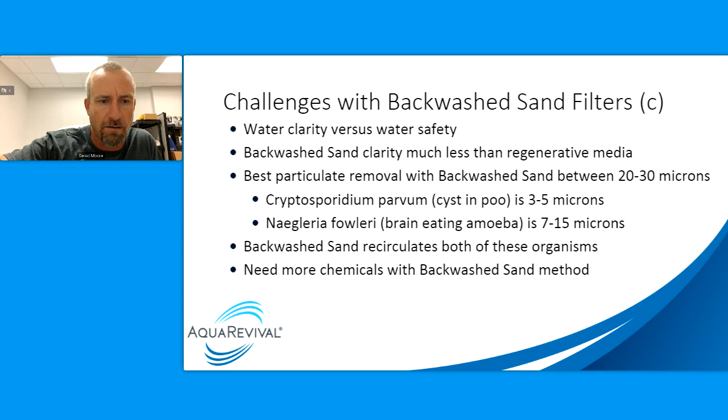Challenges, let's see here, with backwash filtration. Something to note on that last page, I think. About this guy here? No. This one here. This guy here?

You know, that size is comparable for what a change out would look like: getting rid of 6 sand filters and putting in 1 Aqua Revival filter that is about the same size as one of the sand filters. So I think that's good information on that slide.

Yeah, we have a 1 million gallon natatorium that's looking to go from 8 25-square-foot sand filters doing just over 3,000 gallons a minute, and they only need the 60 T to easily exceed their circulation.

Yeah, the big difference came when we got our filter certified at 2 GPM per square foot, and we're going to touch on this in a moment. Then making the big leap to 3 GPM per square foot, there are still people who aren't comfortable with that, but the more people get comfortable with it, they realize we can buy a smaller filter, and that significantly reduces your capital expenditure up front and improves your operational expense down the road.

So I am dying to get to this next slide because we've got some automation in the slide, and we don't have automation in all of our slides, but let's see if it works. Yeah, so there is the, I don't know how to make the number 3 and 4 animation work on that, so I apologize. There should be a line across that slide that talks about, oh, there it goes. One of my helpful folks in the background is helping me with that, I believe.

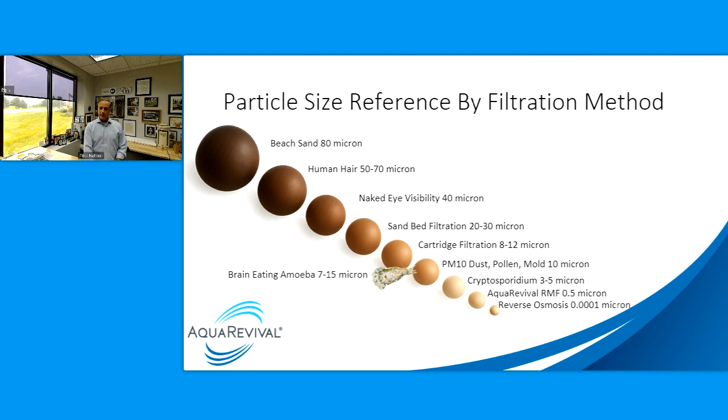But when you filter that crypto out, you have to demonstrate that you're not letting it go back out to the pool. UV will unzip the DNA. Ozone will destroy crypto. But when we catch it in the filter, it's not getting back out to the pool again. So we can filter out 99% of the crypto per pass. So per turnover, you're getting more. Now, obviously, more people jump in the pool, more crypto goes with them. But this gives you a sense of, and here's another slide looking at that same information a little bit differently.

It's really the same info, but it gives you a sense of, you know, a sand bed, you push that water in down from the top, and it's got to go through that bed and get stopped by the velocity going down and it getting trapped in between sand particles. Whereas with a Regen filter, pressure DE, like an Aqua Revival, you have dirty water come in from the bottom, and then it's got to go through that tortuous path of those septums, those filter tubes, through the media, through the tubes, and out the filter. And it is able to filter a much, much smaller particle.

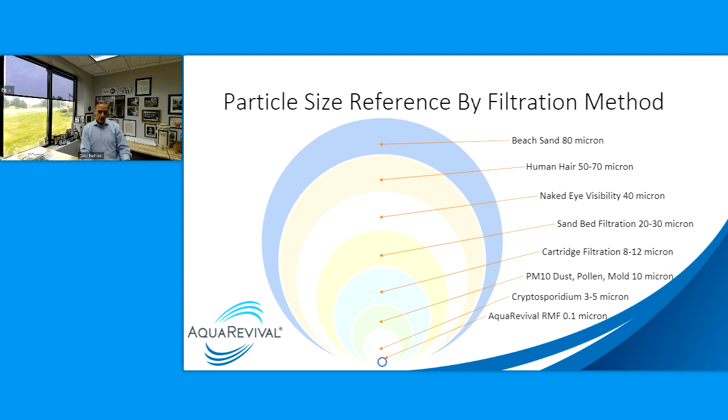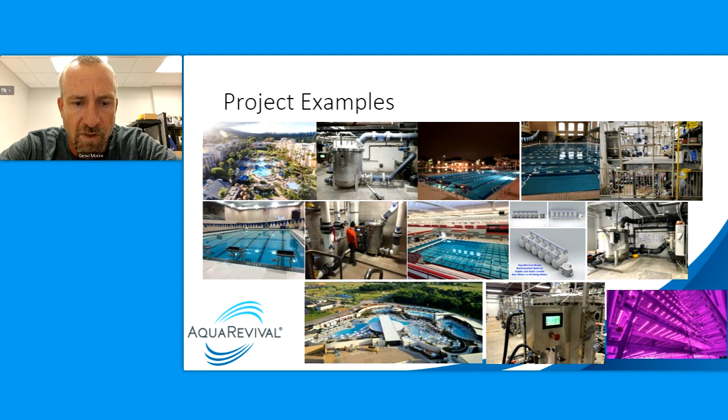The bottom right is your agricultural. The next one is Carmel High School. They now have 5 Aqua Revivals up and running there. All the pools look great. They couldn't be more happy. Great. That's great to hear. I know that bottom left one is one of yours, Bart. That's one of the casinos. That's one of the most challenging bodies of water we've done.

If you look at the water that surrounds that center, whatever you want to call it, that's actually like concessions, but that is all one continuous body of water. And the challenge there is going from a large area that's 6 inches deep to a deeper area, back to a shallower area. You know, maintaining the premium circulation was key. But then again, this is a facility that is in Oklahoma, and it's not really bound by, say, bather load rules.

So this facility will get to the point where you could almost walk across it on the heads of people and not get your feet wet. It's very crowded, very heavily used, and rarely ever has any issue that would result in a pool closure or cloudy water or anything like that. Certainly, we can point to the filters as a very core role in why the water is clear all the time.

Yeah, and when that pool was being built, I remember being down there during startup. They were sandblasting the deck at the same time we were doing commissioning, and there was more dust in that air and in that pool at that time as we were commissioning it. And it turned out, I think it might have been me, I put the wrong K value in, and we left, and the thing was screaming. And you guys went back out and found that the filter was running somewhere north of 3.

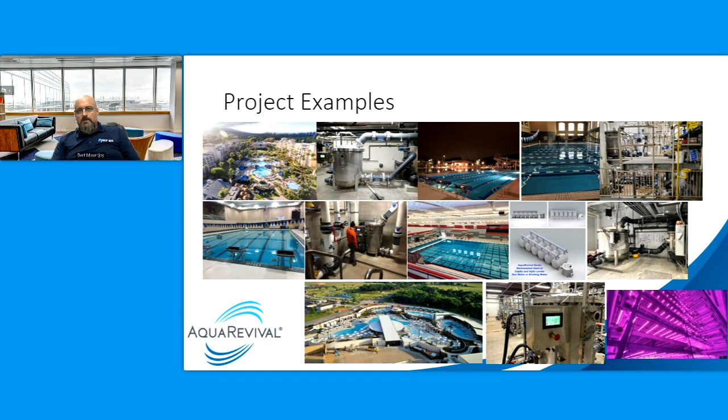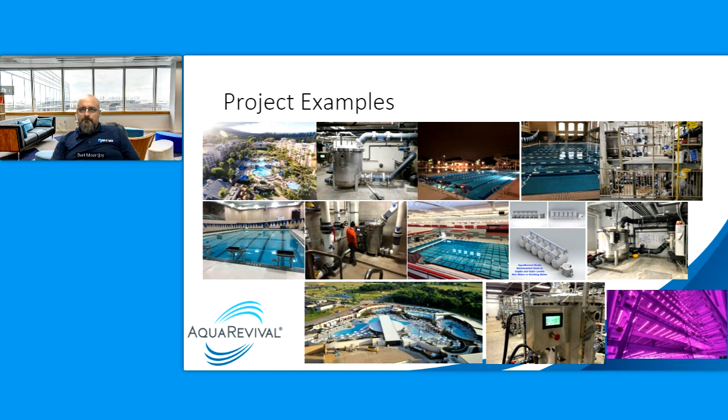It turned very red with all that Oklahoma red dirt, and it did. We ended up doing an enzyme soak on it with your enzyme process, and that was 3.5 years ago, and that filter purrs like a kitten to this day. Yeah, that's right. I'm going to jump to the next slide. So

You can talk about two things primarily, safety and sustainability, right? You want the safest water because you're putting humans in it, or you're putting animals in it, or you're doing something, but you want safe water. And we have the only NSF certified crypto filters. There's other people out there that talk about crypto, but we have demonstrated it. We went to NSF, we got the testing done with NSF because they're the gold standard. But

beyond that, let's say between that and sand, and you've got UV on your system. If you have sand and you're going to be backwashing, you're going to be backwashing chemicals and heat to the street, and you're going to be using more electricity to do that because of the geometries of those filters. You're also going to be working your UV harder. You're going to be working your lifeguards harder because the water's simply not as clear.

If you're counting on your UV transmittance to get UV to the crypto, to the brain-eating amoebas, to the other things that UV is designed to handle, or ozone, or chlorine, or anything that you're putting in the water to help your sanitization process, cleaner water helps the chemicals work better. And you don't need as much chemicals in order for them to work better. So it's really a multiplicative situation that you find yourselves in. And anybody who's running Regen can tell you that they have demonstrated that those are real world effects.

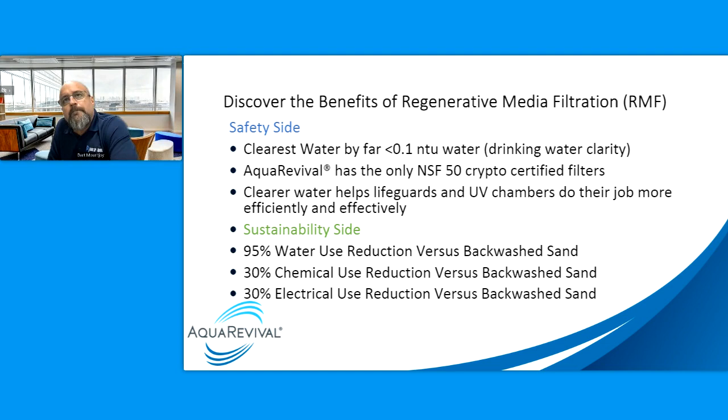and they have not had a single transmittance issue. I think the last time we tested, they were 97, 98% UVT, whereas last year they were lucky if they could get close to 90. And the only thing that changed was the filters. That was it. Interesting. And I will add that those sand filters did have brand new sand in them. Important, very important. So they weren't channeling. They were good. They were changed out.

We had a job that we did, tore out sand beds, put in Regens, went down there to do startup. I had a brand new pair of boots on, and Bart had the floor all wet, ruined my boots. That's not the point of the story, though. The point of the story is

the UV that was in that room at the time was saying that it was in spec. Walked into the room, and the city operators, I stopped one of them, and I said, "Hey, UV says it's in spec. It can't possibly be, because we're not flowing water through there." And the operator said, "Oh yeah, it does that all the time."

That is hugely dangerous, right? If you're counting on UV to get after your crypto, because we know crypto will live in chlorinated water for weeks. If you're counting on the UV to handle that crypto 100%, like you would if you've got sand bed filters, you're playing with fire a little bit. So

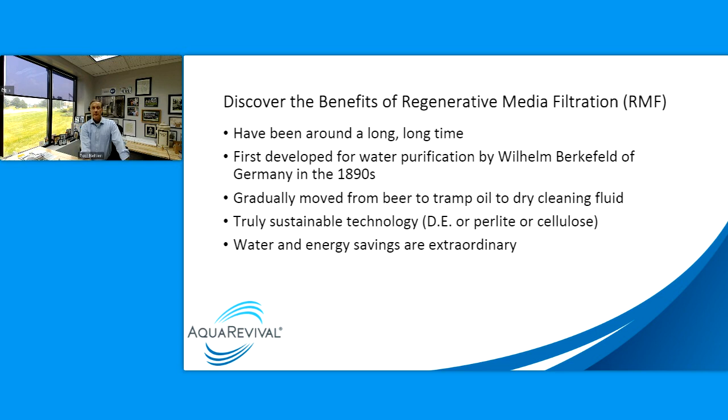there's a myriad of ways to skin the cat, depending upon if you're doing a reno, if you've got a pump room that is in a high water table area. We can handle all of these. All of these situations have been solved. So don't let anybody tell you we can only put in sand or we can only put in X because of Y. There's some really smart engineers out there who have come up with some really creative solutions to give you the best quality water.

And we work with those engineers. We have really good relationships with a number of the international engineers around. They spec our filters all the time. So let's see. Paul, to that, let's move on.

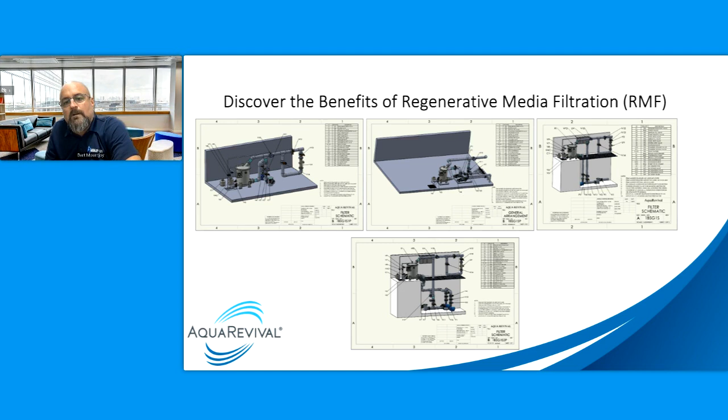I was going to say real quick, one of the big myths going around with Regen was you can't put Regens on a skimmer pool. It's got to be gutters. It's got to be a surge tank. But working together with your team and the engineers, we have these successfully on skimmered pools. We have them successfully on lift applications, actually challenging lift applications, despite all of these beliefs in what the Regen filter cannot handle. We like to come to you with challenges, and I feel like we've succeeded in all those challenging positions.

Yeah, we have some great partners around the country. You and Jared are head and shoulders right up there, top of the pile, as it were. So we're happy to work with you guys. We don't ever quit on anything, and we have solved some interesting dilemmas along the way.

This next slide, I am going to read a little bit of because it's a very important slide. So NSF, and I say NSF because they're the gold standard, but it could be IAPMO, it could be these other people who use the NSF standard as a testing method. They give you a filtration rating, and it's gallons per minute per square foot of your filter. Whether that is a sand bed, 20 gallons a minute per square foot of filter area I think is generally accepted as the maximum for sand bed. People usually don't go over, say, 15 or so.

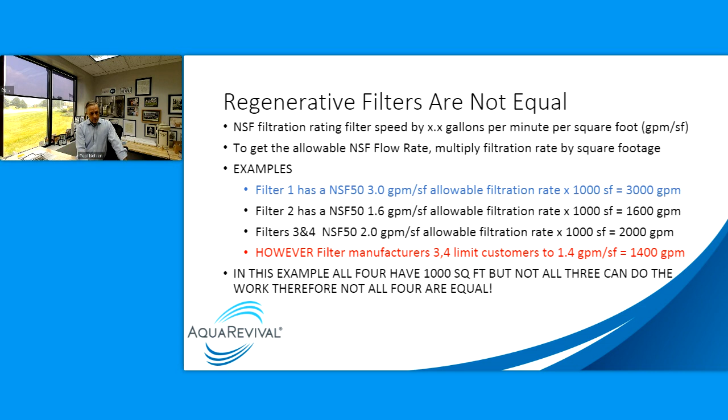So let me get to this guy here, and this is the only one, like I said, certified for crypto. But we wanted to talk about maintenance. So let's compare the maintenance. So side by side, if you are going to, why don't one of you guys talk about this? This is probably more in your wheelhouse, because you're managing these pools, running these pools.

Yeah, I have a good example, and I'll speak on Carmel High School's behalf again. Their existing pool was built in '98. The existing pool was pressure sand. They soon realized they had a problem with extended backwashes, because for whatever reason the subdivision on the neighboring road, those with basements, would experience those long backwash cycles in their own basement.

So that was a big deciding factor for them on switching to pressure DE. Just the water loss issue. None of those neighbors will ever be ticked off again, due to not having to expel thousands and thousands of gallons of water on a weekly basis.

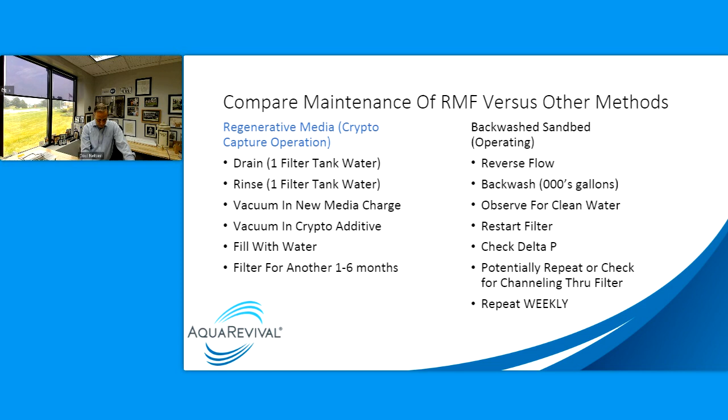Hey, Paul, sorry to cut you off. It's Jared. If we could back up just a minute to the media change on a pressure DE versus a backwash on a pressure sand. I guess I'll use Carmel again. Maybe it's just because we're proud of it, but it would take me twice as long to backwash that existing pool at Carmel High School as it would to do a media change. Maybe even 3 times as long, just to give people an idea of how easy the media change on the pressure DE really is.

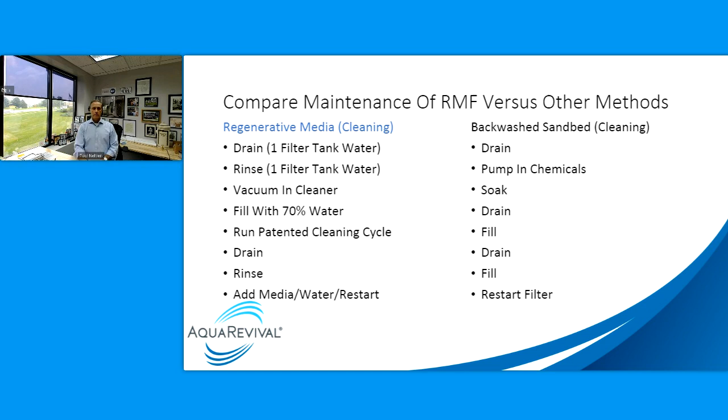That's all I have. Good point. Yeah. Good. All right. Let's see here. All right.

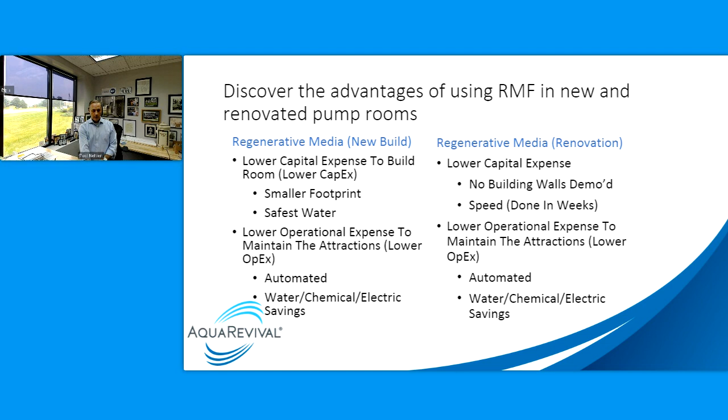Bart's been in pool rooms since he was smoking cigarettes and drinking beer as a kid. We were talking about that just before we got on here earlier. Thanks, Paul. I don't know if Bart's still on the line or if we caught him in a moment of weakness. I might have caught him in a moment of weakness. That's perfect. Okay, good. I'm here. Hey, I did want to get back to your cleaning. We moved on a little quicker than I was ready. Not to talk more about me because we don't need to do that.

And I don't know if we moved past the slide already or not, but you keep talking about NSF, and it's something that I hit on a lot of times with users, with contractors and with facilities: not only are you NSF certified with the crypto, you're NSF certified with the 3 gallons a square foot. Both to me are kind of game changing in the industry, but you're also NSF certified for clean in place.

And that to me is huge because I came out of the mechanical room, and I was the rat that was tasked with, hey, just make it work. We got to pass code. The pool needs to be open. Whatever that means, whatever the system is. When you look at a Regen versus a sand filter and the cleaning procedure, there's huge differences there. And it's commonly known, like, hey, you'll never get all the dirt out of the sand filter, right? You could backwash it for 3 days and there's still stuff in it.

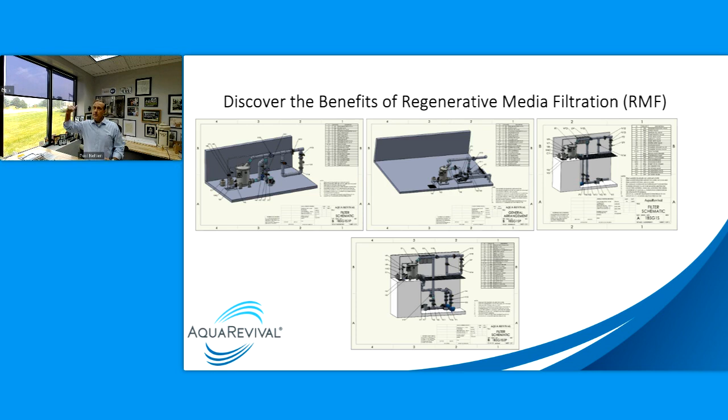If you're building a new building, you don't have to build as big of a building. You don't have to build as tall of a building. You can build a smaller pump room, and that will allow us to have an overall savings. Your total cost of ownership is lower with our filters.

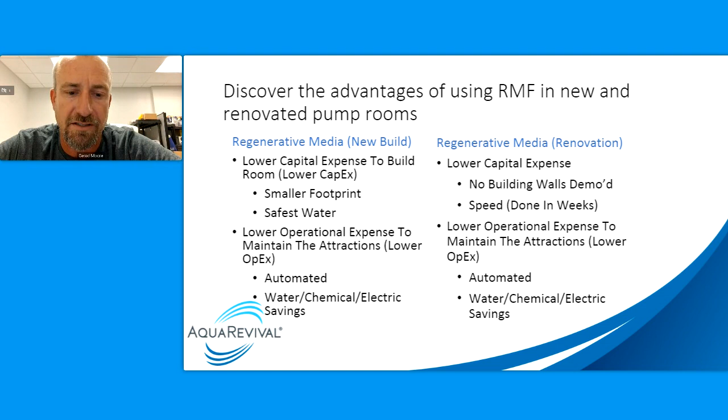This question number 6 here: sand is so easy, why would I change to something more complex? These guys have touched on this. Bart, you and Jared, I'm going to throw this to you guys. So when I first looked at one, it does have maybe some more moving parts, but really it's not more complex. And this is how I train our guys. Every system is accomplishing the same purpose. Maybe not equally, or we wouldn't be here, right?

But every system's doing the same thing. And once you learn the process of that system, it's really not that complex. Pressure DE versus vacuum DE is really not that different. One's happening in a pressure chamber versus an open suction pit with bags. It's a very similar concept.

We just tie the chemical controller, the filter, the UV. Everything is integrated with one another to go through the motions safely. So, for example, you're not going and shutting your heater down 5 minutes prior so it can cool off. That's done in the programming now, in the communication between all the components. Same with the chemical system, the UV system. These things revive themselves once a day typically, and nobody has to be there to do it. It does it all itself.

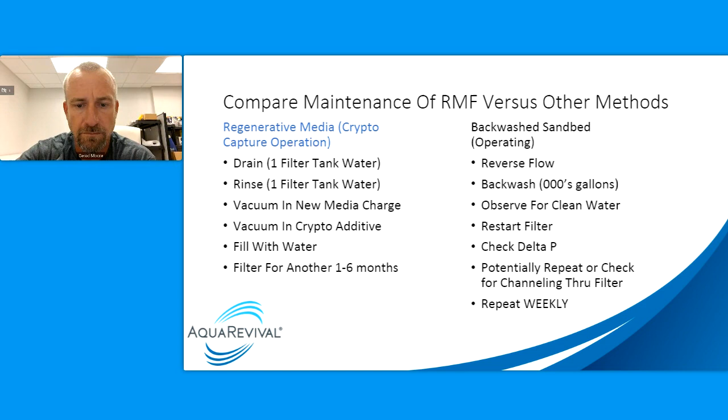I agree with that, Jared. I think that in a lot of ways you can argue that about sand backwashing, especially when you get into the automation of it. I know you're running some vac sand systems, and if you don't have a little bit of automation on that, you're going to have some pretty big forearms cranking all those valves around. But when you're dealing with pressure sand, if you do have an automated backwash system, you're looking at either automatic electronic actuators or diaphragm valves or whatever.

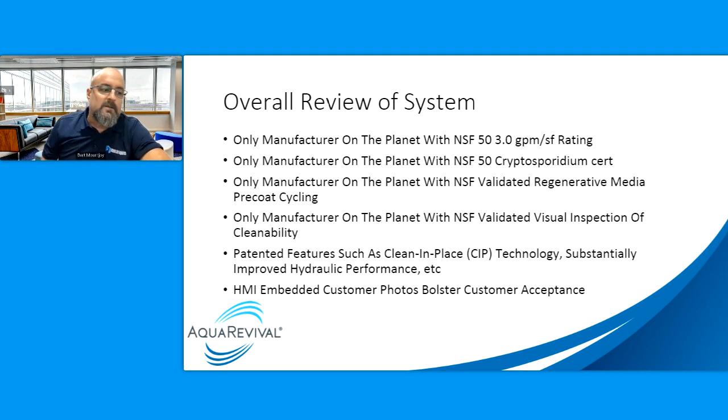What I speak to a lot on that is, hey, if we've got an automated backwash system on our sand filters, nobody wants to let that do its thing when nobody's there to watch it, because if something goes haywire on a linkage system or on a diaphragm system, next thing you know, with the amount of water you're using to backwash those filters, you've drained half the pool, and the guards come in the morning to a half empty pool. With the Regen, with the way that the valving is done for the revive cycle, some people call it something else, but the way the valving is done, you don't really run that risk.

The valves are never going to deadhead. You've got safeties and redundance there. There is a lot going on with that system, but relatively there's not. I mean, you're lifting the tube sheet and you're switching a couple of valves. The controller controls the VFD. It starts and stops the pump.

And sure, there's a lot more bells and whistles we can put on there. And we love bells and whistles. We put them on all these things. These engineers are just in love with, automate everything, cross connect everything. And that's kind of one of the things we specialize in. But it's really not complicated. It's just different. And I think that's what you had said, Jared, you've been a sand guy. You're a sand guy. Sand's what I trust.

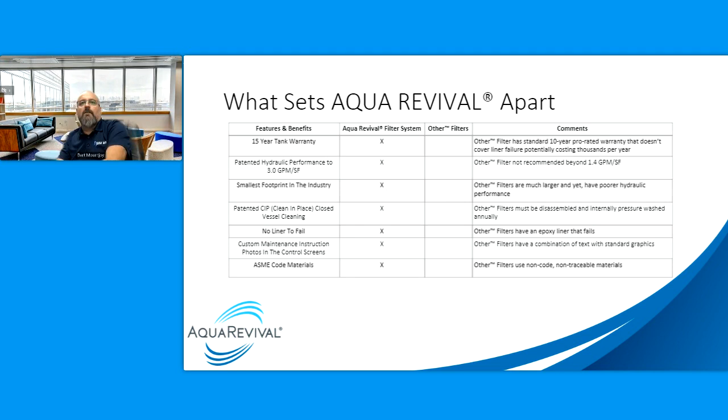There's some really good videos on the website of the procedures. But it's with the images on the screen, and the fact that we could actually put the images of the actual equipment there, not the generics, so you can see what V8 is. Here's the picture of it. Oh, there it is right there with the tag that says V8. V2, V whatever, and it really makes it easy to maintain the system.

And I also think that long-term maintenance on the system, from a cost standpoint, what does it cost? We were talking about one of your vac sands the other day. What'd you quote them to change that sand out, every 4 or 5 years? $30,000. $30,000 just for new sand.

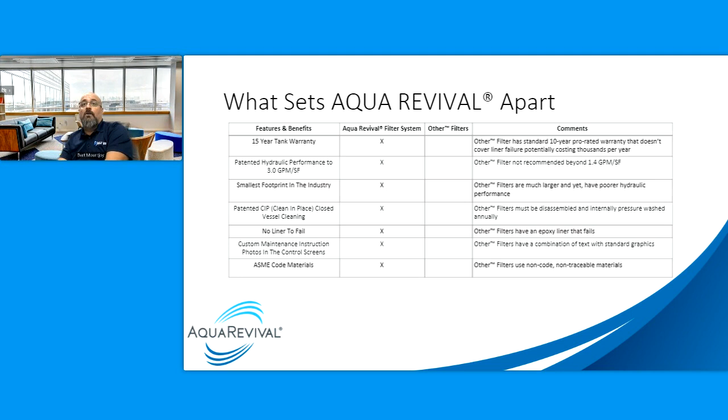I've got a customer we quoted, they've got a stack set in a mechanical room down the road, and they've asked us and other companies for quotes. You're about going to have to take the drywall off the ceiling to get up high enough to get sand in this upper tank. It's a $30,000 or $40,000 sand change. On filters that are no longer made, by the way, and I'm not going to guarantee those laterals are.

So the cost of ownership between the water, the chemicals, the potential downtime, the sand changes, and another thing we talked about the other day, which we did at one of the park and recs in the mid cities here in DFW. This was at their outdoor facility. They've got a competition pool and a lazy river and a couple other bodies of water in there. They'd run out of storage. And they were scrambling around. I think at one point they had put up a temporary shed to put their lane lines in.

Well, we took out 6 National filters that were all 25 square footers in a pyramid. Whoever thought that was a good idea, I don't know. But we took those out and, on 2 bodies of water, we put in 2 of the mid-sized Aqua Revival filters. All of a sudden, they had enough room in this mechanical room for 2 sets of lane line reels. And they store half of their furniture there in the off season. They can roll guard chairs in. I told them they could park one of their maintenance trucks in there. We have cleared up a lot of room.

On new construction, you can make the mechanical room smaller, but even in the aftermarket, you gain a lot of storage space, which is one of the things that nobody really thinks about.

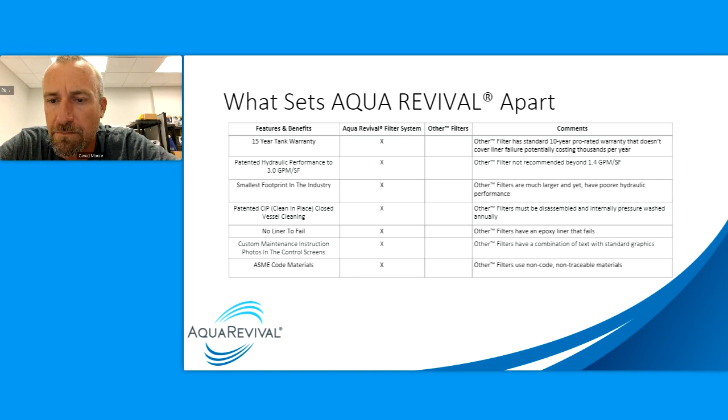That's a great question. And then Chris Catone, you asked, can you speak to the cost, please? It would depend on what size body of water you're putting in. So the best thing I can answer on cost is you're going to look at like a 2-year payback on it, and reach out to us. We can put you in touch with one of these guys and get you quoted on a system. Once we know the size body of water you've got, what condition your pumps or drives or the rest of the pump room is, these guys could take care of you. So I hope that answered the question.

To that point, Paul, real quick, we're pushing the engineers on what they would consider acceptable for these regenerative filters, where traditionally you've got engineers that won't call out more than 1 gallon a square foot. And we have routinely run yours above 2, and in some cases, I know you've got them running closer to 3. And really that just becomes a factor of head pressure. So it's just making sure that we have the pump there to push it through at whatever we want. The more gallon per square foot we can put into these things, obviously they're giant stainless steel vessels, the more pressure we put on them, the more water we put through them, the more money we can save the customer, and not sacrifice the water quality in doing so.